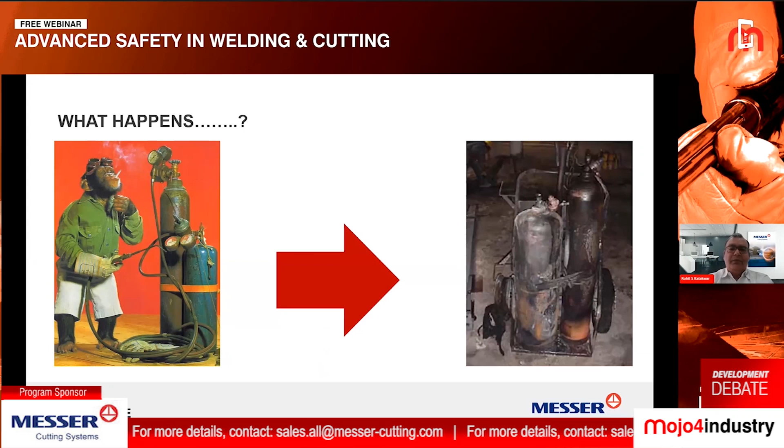Now, what you can take out from this picture - if you ask somebody to do an oxyfuel process who doesn't have any knowledge about the process, who is untrained, and the person is using products which are not made as per standards, what will happen? Well, accidents are bound to happen.

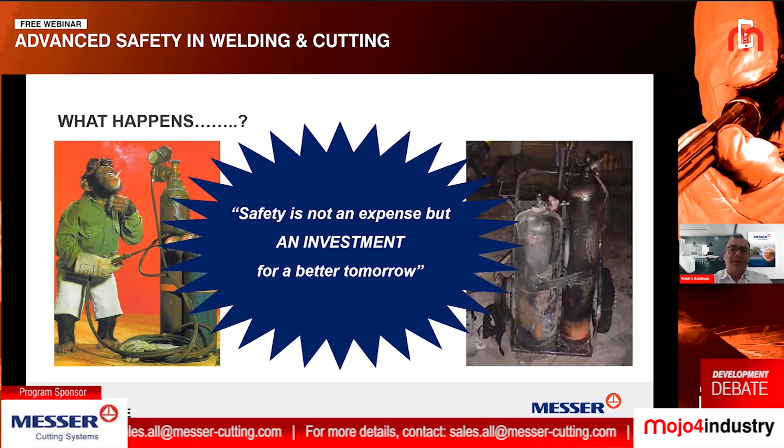So, gentlemen, I just wanted to say that safety is an investment to avoid accidents. If you go for a good quality product, a branded product manufactured as per safety standards, then there will be no accidents at your place. But if you go with local, non-standard products, then accidents are bound to happen.

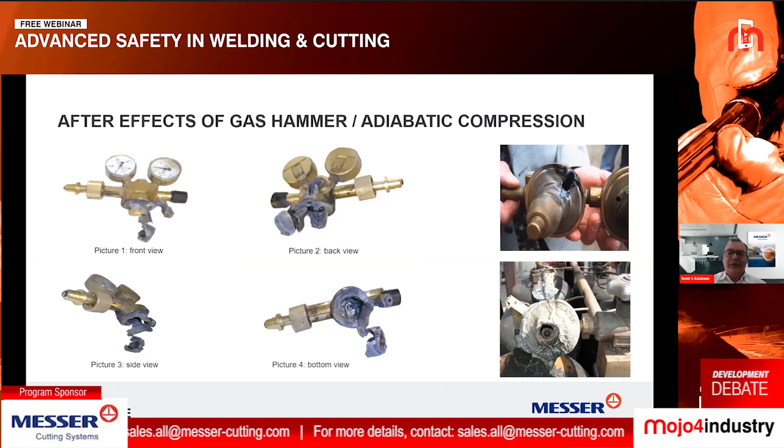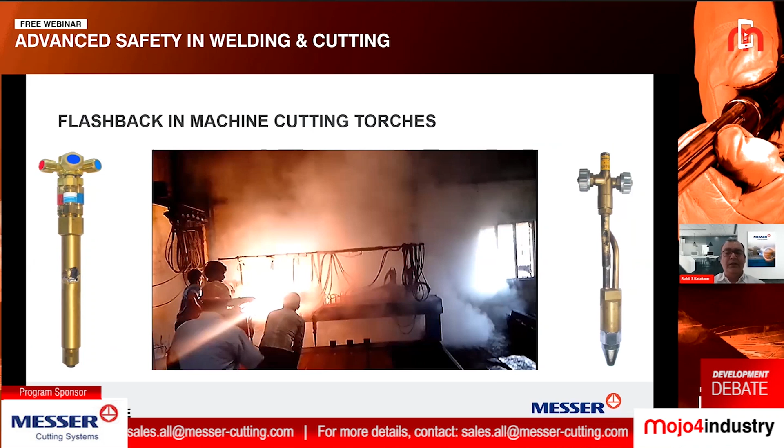Accidents not only occur in handheld equipment, they happen also in machine cutting torches or CNC machines. Here you can see, because of flashback, the complete machine was burned off.

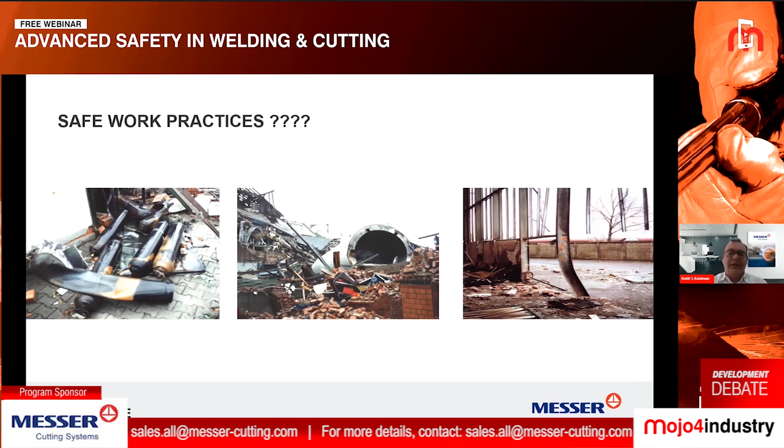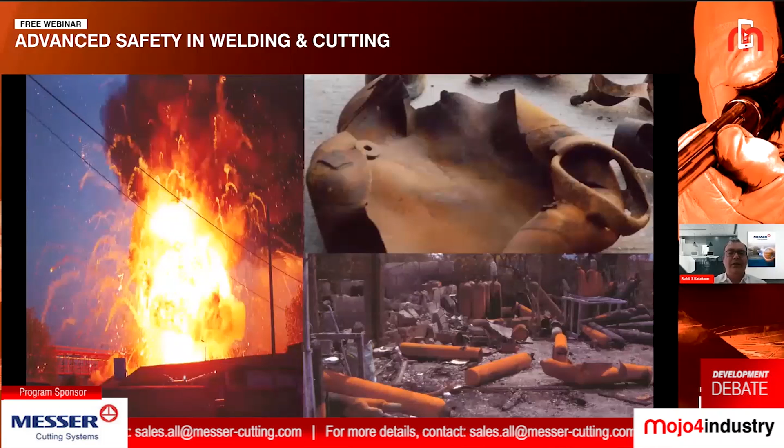Such types of accidents happen unless and until we follow safe practices. Here you can see a few other clips where accidents have occurred. This should not happen in our factory or our premises, because if it bangs, then it will be too late - there will be a lot of casualties. So what should we do?

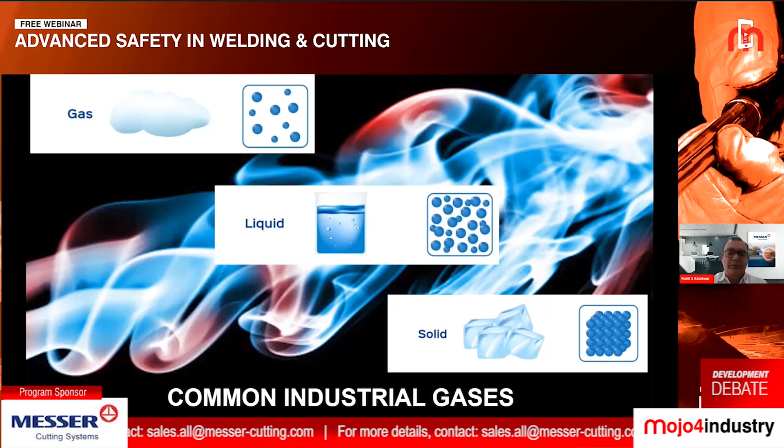Before carrying out any oxyfuel operation, we should know about the gases we are handling. In the name itself, you can see oxyfuel technology or the oxyfuel process - there are two gases, one is oxygen gas, another is fuel gas. Fuel gas can be different types - it can be LPG, propane, or methane - but oxygen is common. So we should first know the properties of the gases. From an oxyfuel point of view, we should remember the two gases: oxygen, which is the oxidizing gas, and fuel, which is the flammable gas.

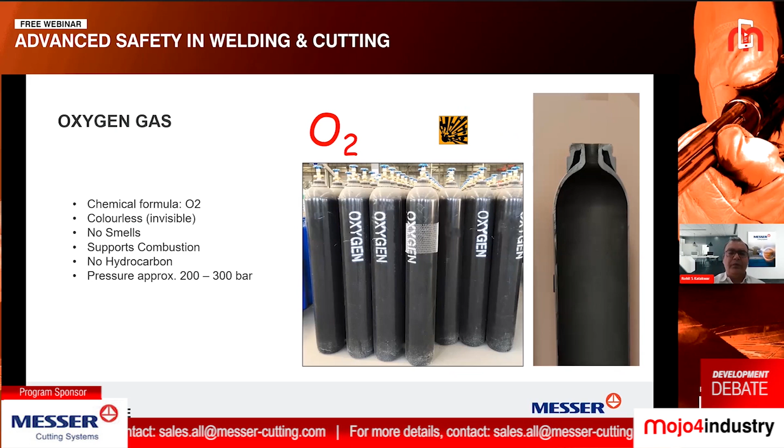Now let us come to the first gas, which is oxygen gas. Here you can see the oxygen cylinder, which is generally black in color, and on the right hand side we have shown the cross section of the oxygen cylinder. This is a gas which is invisible - we cannot see it and we cannot smell it. But this is the most important gas because it supports combustion. If you want to burn something, you require oxygen.

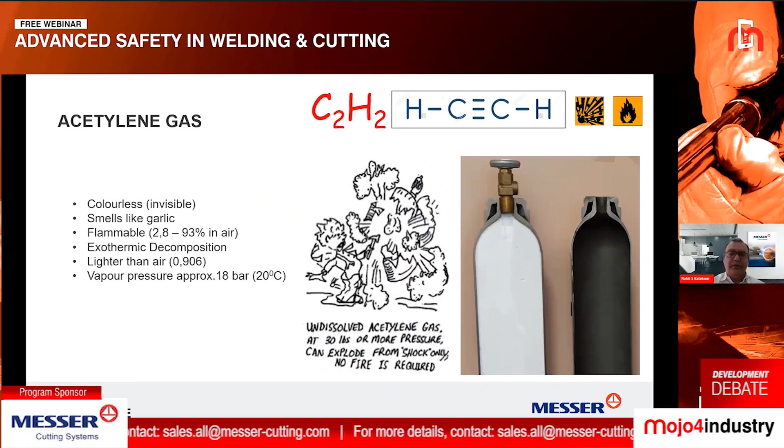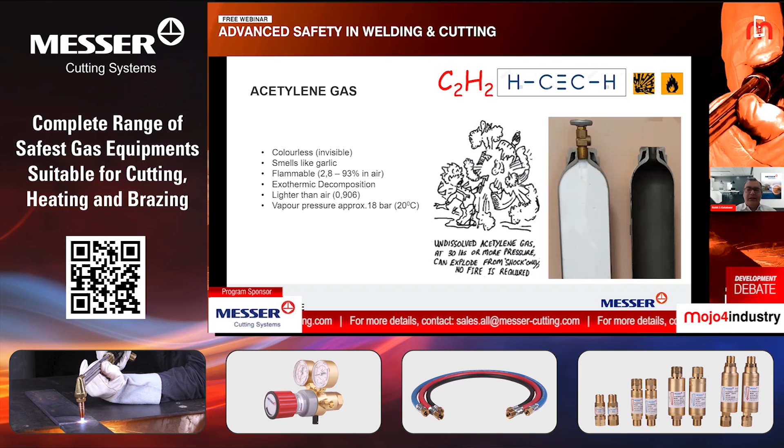Now, acetylene is the fuel gas. This is the most common gas used in India, along with propane or LPG. Acetylene gas is basically invisible, but it smells like garlic - when it gets leaked, you come to know that acetylene gas is leaking. The cylinder pressure is around 18 bar, and this gas is lighter than air - its density is just 0.9.

Now, the other fuel gas I was talking about is LPG gas. LPG gas is basically a mixture of propane and butane. This gas is also invisible, but it smells - there is a special material, mercaptan, which is added. It's a hydrocarbon which gives us a smell and tells us the gas is leaking and you have to take care now.

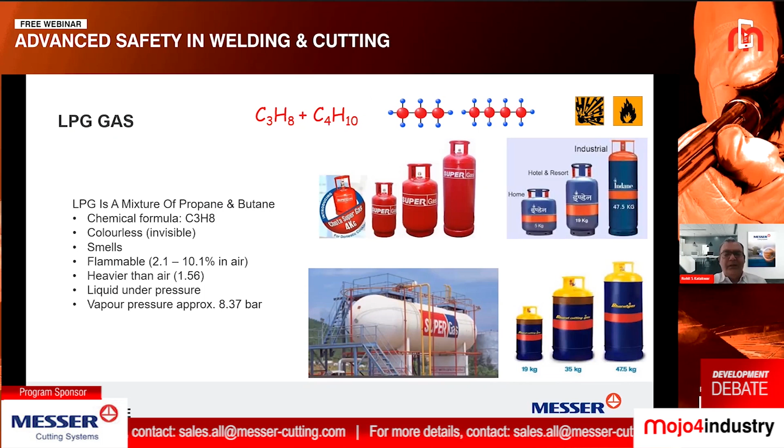Now, this gas is heavier than air. The density of this gas is 1.56 and the cylinder pressure is approximately 9 bar. Now, the density of air is 1. If the gases whose density is more than 1, then what will happen?

They will lie down on the ground or form clouds on the ground. Propane, as I said earlier, has a density of 1.56. That means if propane gets leaked, it will not easily dissolve in the atmosphere. It will form clouds on the ground.

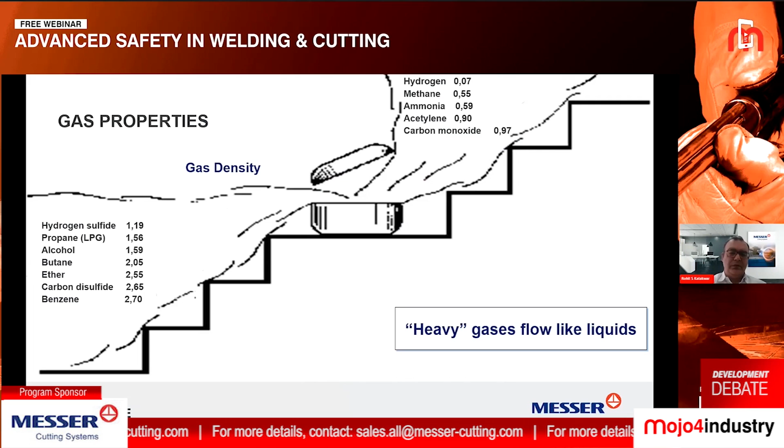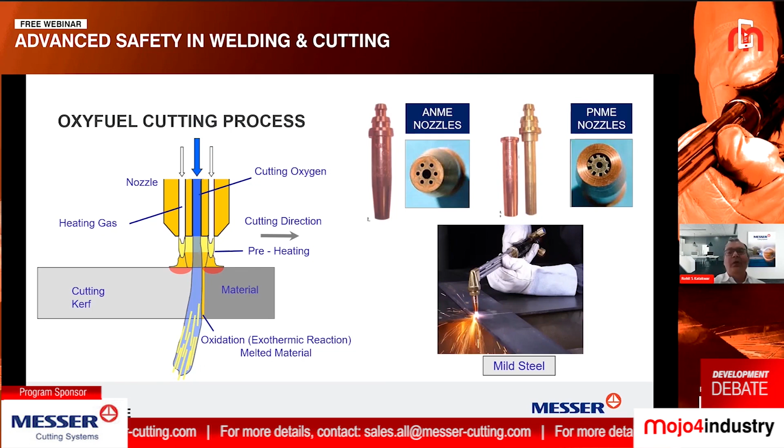Now, depending upon the fuel gas, you have to select the nozzle. Here we have shown two types of nozzle: one is the ANME nozzle and another is the PNME nozzle. The ANME nozzle is a one-piece nozzle, generally used for acetylene gas or DA gas, whereas the PNME nozzle is used for propane gas, with propane gas or LPG gas.

Now, you might have heard if a person is cutting a plate, and in between, if the gap between the plate and the nozzle reduces, then suddenly the flame extinguishes and a 'fut' type of sound comes out. Why does this happen? Because the molten metal comes and sticks on the face of the nozzle.

This could happen many times. What the operator does is take a pointed needle, clean the nozzle, and restart the operation.

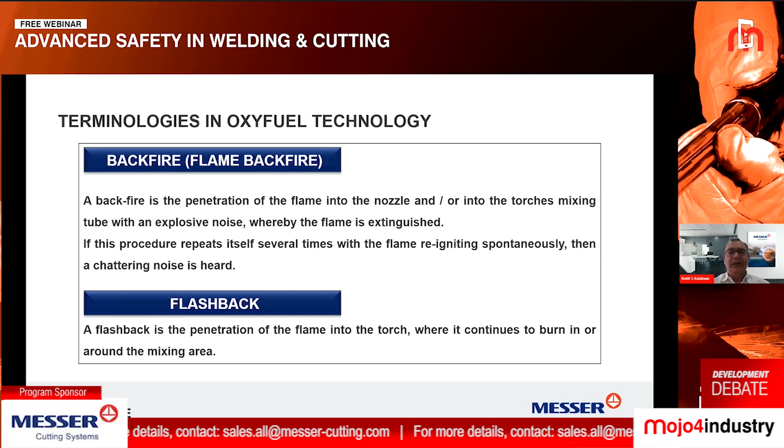Whereas flashback is different. Flashback is the penetration of the flame into the torch, where it continues to burn in or around the mixing area. So in case of flashback, the flame gets inside the torch and keeps on burning. Flame, in the sense, a small spark keeps burning inside the mixing chamber, and it can cause an accident because in that mixing chamber there is already fuel and oxygen present, and this flashback or spark reaching there completes the fire triangle, and a blast can occur. So this is the difference between a flashback and a backfire.

So in case there is a flashback, it travels back and reaches the mixing chamber, and the blast occurs. So the worker who is cutting can get a burn injury if there is a blast, because that blast will be near his hand.

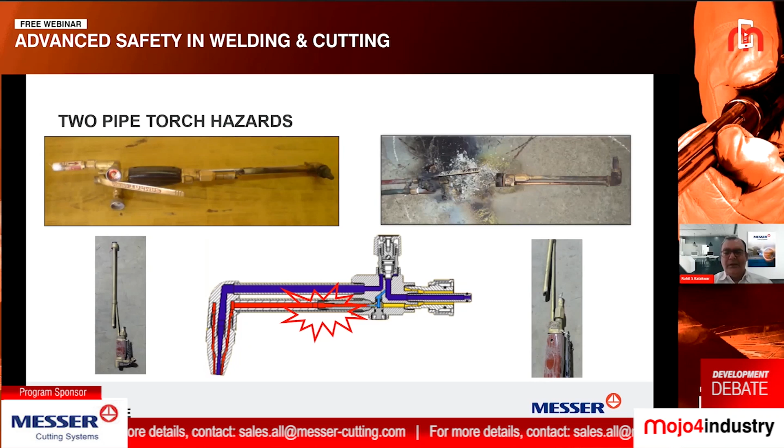So it is an injector type of mixing in this case, whereas in three-pipe torches, the mixing takes place inside the nozzle - the oxygen gas and fuel gas get mixed inside the nozzle. So if there is a flashback, the blast will occur in the nozzle itself. Here you can see the picture on the left where the blast has occurred, but it occurred in the nozzle itself, so the worker's hand is safe.

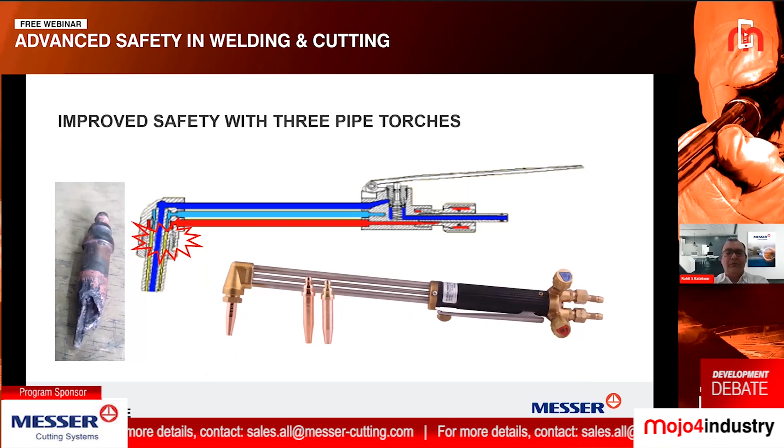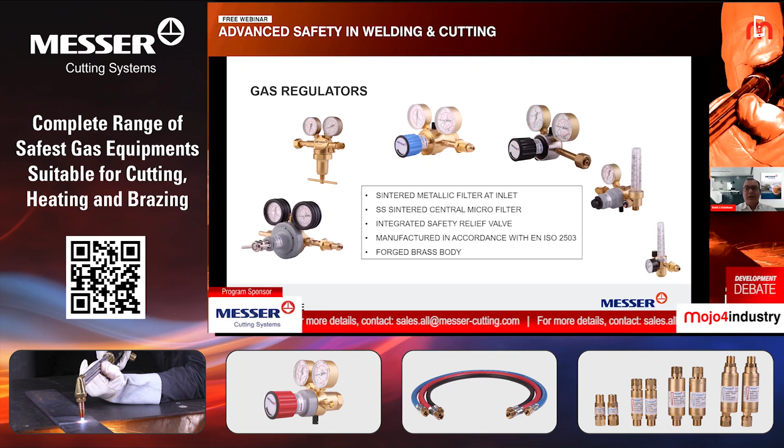Now, the important point is that whatever regulator you are using, it should be made as per certain standards. For example, all good quality regulators are made in accordance with EN ISO 2503, which have an integrated safety relief valve. Just like in a pressure cooker, we have a safety relief valve - if the pressure increases, the relief valve gets activated and the high pressure gets released. The same should apply to regulators also.

In case there is high pressure inside the regulator, suddenly coming, what will happen? The gas will try to escape from the weakest point, and the weakest point is the place from where we adjust the pressure of the regulator. Like here you can see there is a plastic knob or T - this is the weakest point, so it will come off and cause an accident.

So there should be a relief valve inside the regulator. If you always go for a pressure regulator which has a safety relief valve, then the body of the regulator should also be forged. It should not be a casted one, because casted bodies leak very easily. Forged body regulators are sturdy regulators.

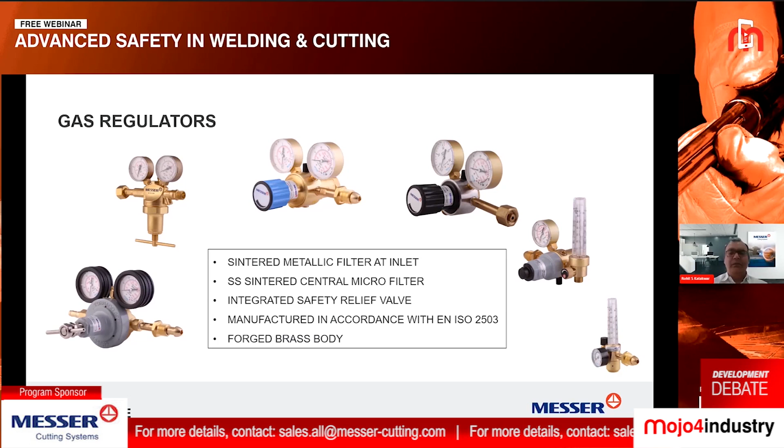They are more reliable and safer regulators compared to the casted ones. So ensure that whenever you go for a regulator, it should be made in accordance with ISO 2503.

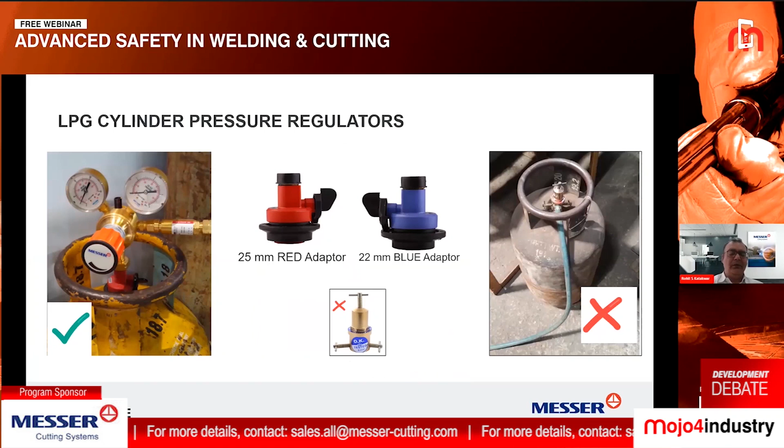Most people don't know that there are regulators for LPG also. They use adapters where there are no pressure gauges. How would the worker know at what pressure he is working? So it is always a safe practice to go for an LPG pressure regulator on an LPG cylinder with a fitment. These regulators come with a fitment because they cannot be fitted directly on the LPG cylinder like our regular regulators such as oxygen.

Gas hoses also form the longest part of any oxyfuel cutting set. They carry gas from the cylinder to the end point, which can also be a cutting torch.

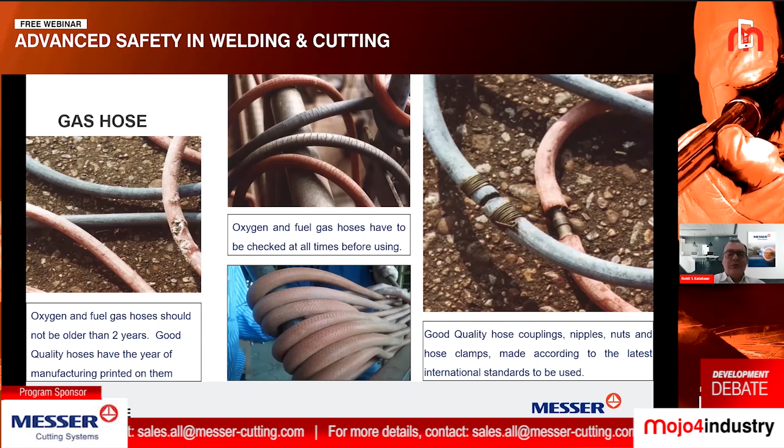So whenever you are doing a cutting process, please inspect the hoses first. The hoses should be free from cracks, and a good quality hose should have a year of manufacturing on them. It is advisable, as per IS norms, that hoses should not be used for more than 2 years, because after 2 years the quality of the rubber gets deteriorated.

Almost 90% of the gases that come to us are in the form of cylinders - compressed gases at very high pressure. So whenever you take gas from your cylinder supplier, please ensure that it has a cylinder cap. The cap protects the valve. If the cap is not there, there are chances of the valve breaking, and if the valve breaks, it can travel at very high speed, like a bullet, because the cylinder is at very high pressure.

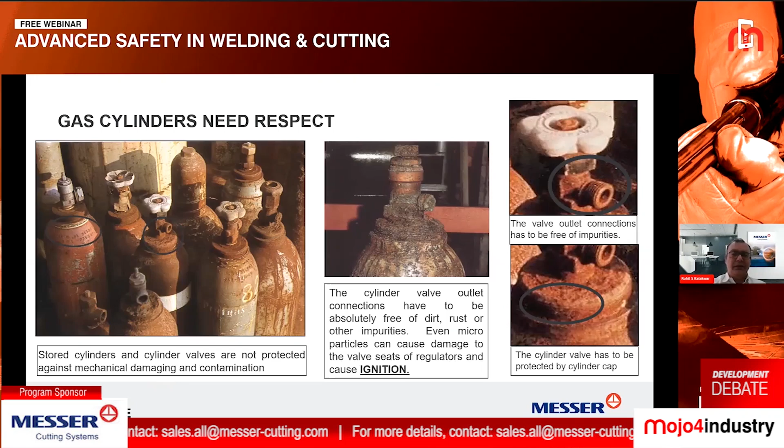There should be no impurities at the valve outlet, because if there are impurities, there are chances of them getting inside the regulator. If oxygen gas is involved, friction can cause high heat to develop, which can cause fire inside the regulator and lead to an accident. Cylinders should be kept in an upright position.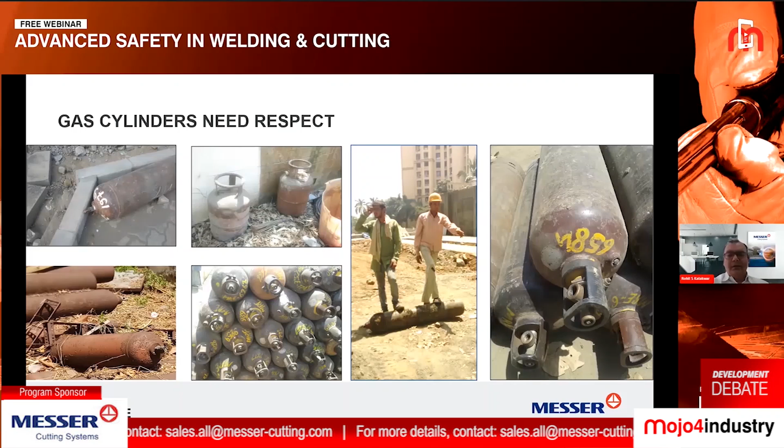These are all wrong practices. You should always keep the cylinder in an upright position. Never roll the cylinders - there should be a proper designated place for keeping them.

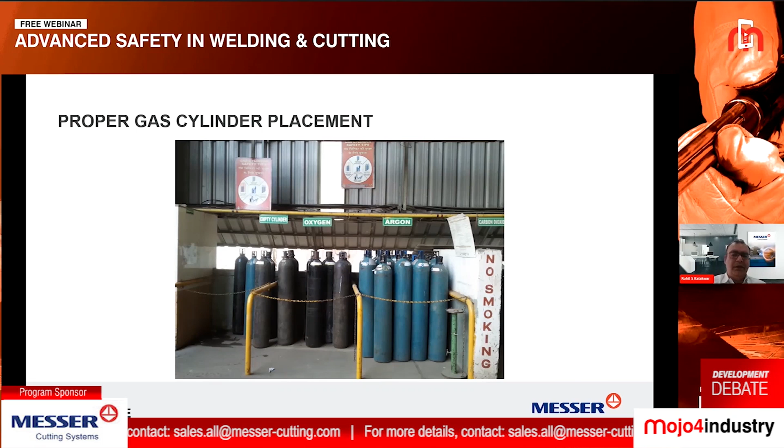Here you can see the proper gas cylinder placement. Cylinders should be placed with proper marking and proper color coding. For example, oxygen cylinders have a black color, and fuel gas cylinders like DA have a maroon color. All these cylinders should be placed according to their colors.

Now let us come to another safety point when it comes to handling of cylinders - the gas manifold system. What is a gas manifold system? It is basically a series of cylinders connected with each other, from which you can lay off a pipeline in your factory premises, and from that pipeline you can give tapping points or drop-off points which can be used as points of usage.

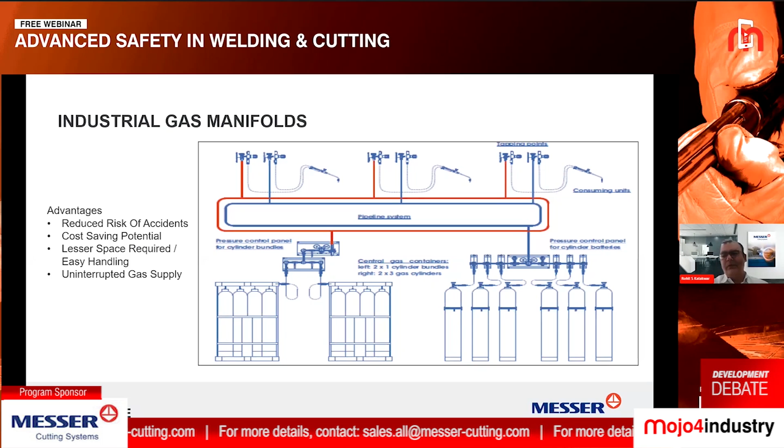So what are the uses of industrial gas manifolds? The advantage is that it reduces the risk of accidents, because all the cylinders are kept outside the factory premises. You get an uninterrupted gas supply and less space is required. The place where you are working will be clutter free - there will be no cylinders since all of them are placed outside. So it's a safe working environment.

So acetylene gas pressure should not go beyond 1.5 bar at any point of time inside the pipe. As per safety standards it should be 0.5 bar, but at some places it goes up to 1 bar, which is an unsafe practice. The acetylene safety guard is a product patented by Messer, and it works on the feedback principle - whenever the gas pressure exceeds the set pressure, it cuts off the gas supply inside the gas manifold system.

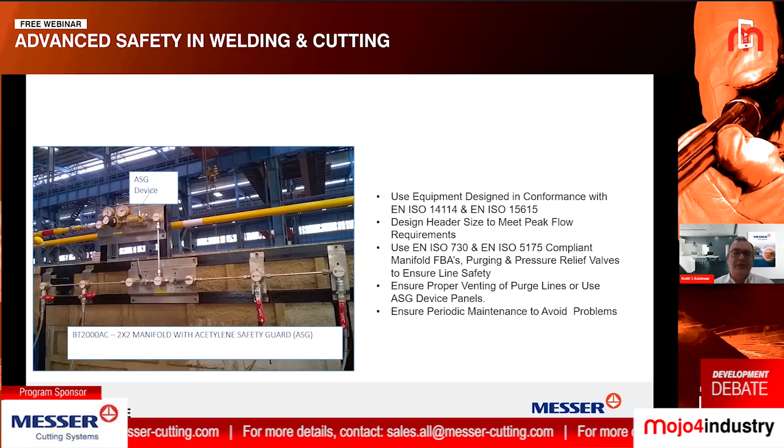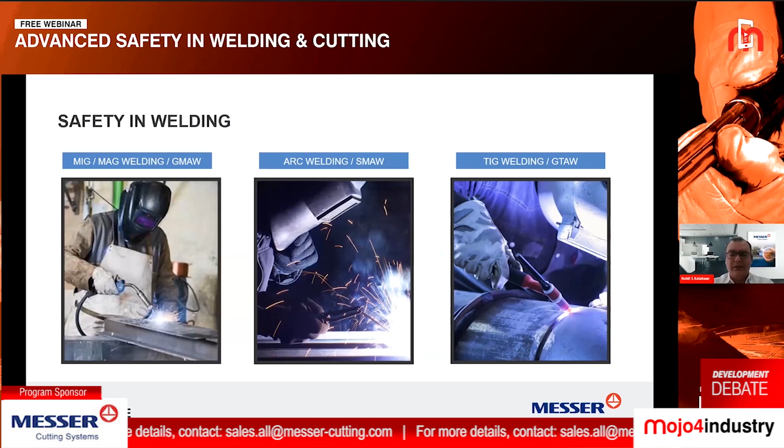Now, till now, we have discussed safety in cutting. Now, we'll discuss safety in welding. These are the most common welding activities carried out in industry: one is manual metal arc welding, another is MIG welding, and then there is TIG welding. A person who is doing welding is prone to get an electric shock. Why? Because he is not using a proper

electrode holder. Whenever a person is doing welding, please ensure that he is using a fully insulated welding electrode holder which conforms to EN standards. They are a bit costlier compared to local electrode holders, but it is worth investing in safety.

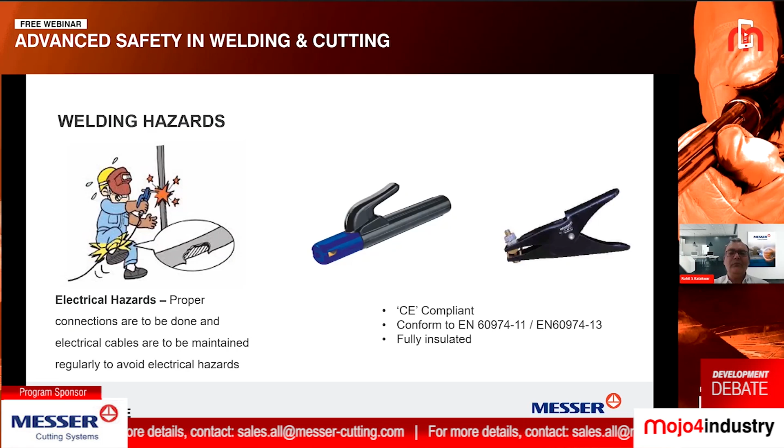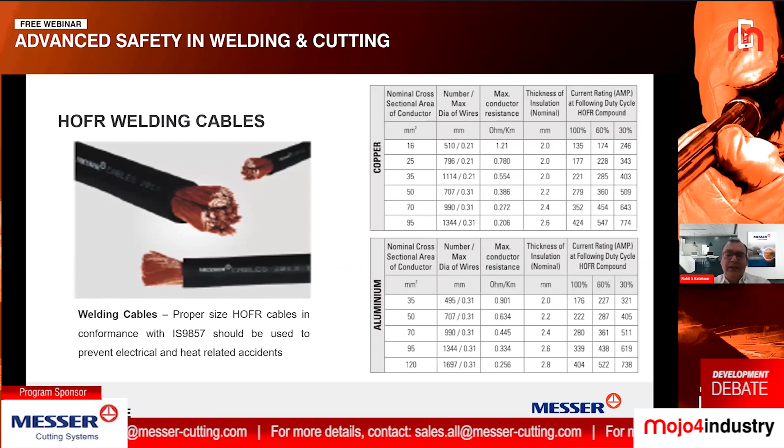Another electrical hazard, or electrical shock, a person can get is through welding cables. There are various types of welding cables available in the market, but the safest type is HOFR welding cable, which is heat and oil resistant and fire retardant. A good company will always ensure that the number of strands inside the welding cable is as it should be.

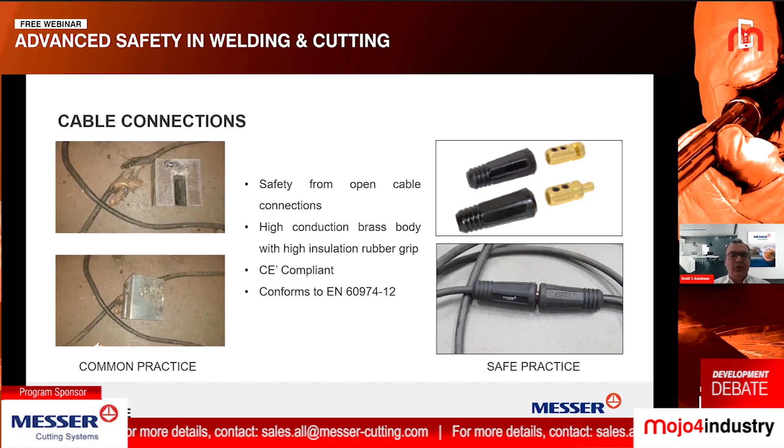In case the welding cable gets broken, what we do is keep some heavy object over it, or we tie a knot over it. This is unsafe practice. There are welding cable connectors. Always use welding cable connectors. It gives you a perfect joint. There are no chances of sparks coming out of the joint. So it is a completely safe practice, and the worker will never get shocked. Avoid such things. Never tie a knot in the welding cable, and never put heavy objects to hide it.

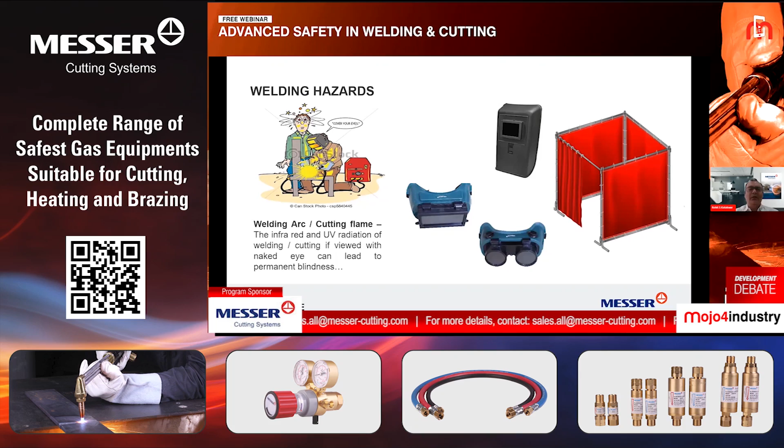Then there is another welding hazard which almost all of us might have come across: arc eye. Arc eye is basically the outcome of the infrared and ultraviolet radiation coming out during welding and cutting operations. So always use screen guards and curtains whenever you are doing welding or cutting operations. Never do it with the naked eye. Otherwise, you will get arc eye, and it can lead to permanent blindness also.

Heat and spatter are also among the most common welding hazards. Whenever you are doing a welding operation, hot spatter comes out, and it can cause burn injuries to you. How to prevent it? The best way is to use personal protective equipment like hand gloves, aprons, arm guards, and sleeve guards. All these products should be used when you are doing a welding operation.

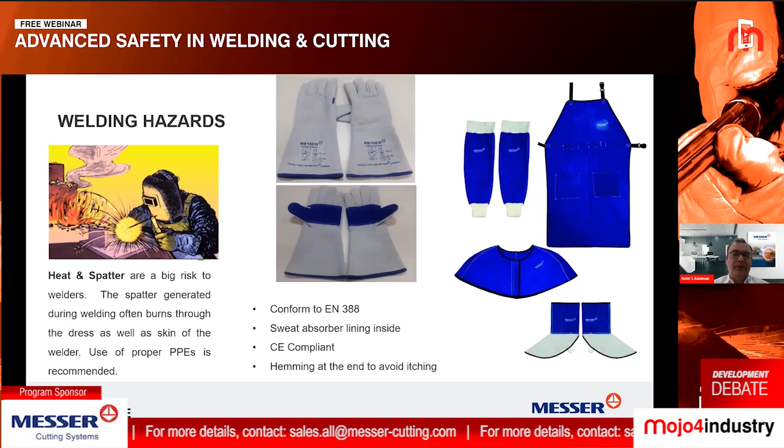But the important point is whether these products are manufactured as per standards or not, because the thickness of the cloth matters. Whenever you are going for personal protective equipment, please ensure that they are made as per EN standards 388.

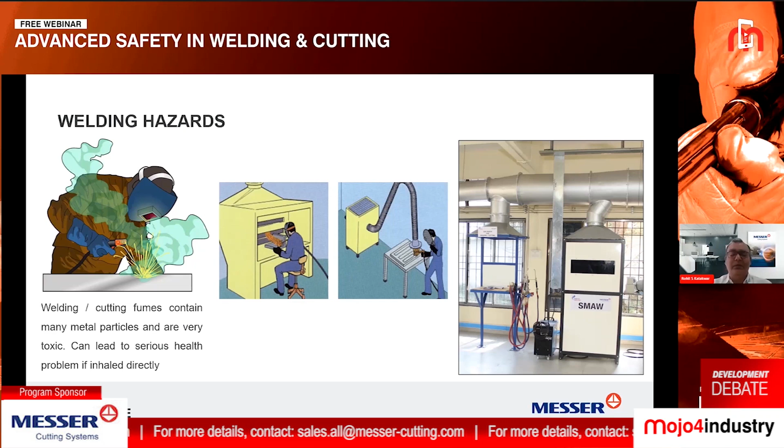The fumes coming out of welding are also very dangerous. So it is always advisable to use fume extraction systems. There are a few extraction systems available in the market. You can go for custom-made fume extraction systems, or there are tables also, depending upon the requirement. For taking cylinders from one place to another, always use cylinder trolleys.

Thanks, Mr. Rohit, for your enlightening presentation and helping us understand the importance of safety in welding and cutting. We have also highlighted some of the common safety hazards associated with welding and cutting.